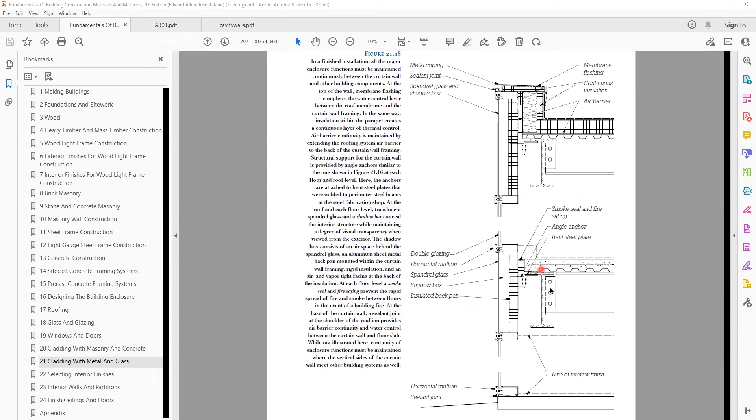So the detail we have is going to be slightly different because we have those K-series joists that are sitting on top of the beam. This is a little closer to what we have. We have these K-series joists that come and sit on top of the girders. And then on top of it, we have a metal deck and concrete. In our case, we will have our cavity wall here for this assembly. So it's a little bit of a combination of this detail and the one we were just looking at.

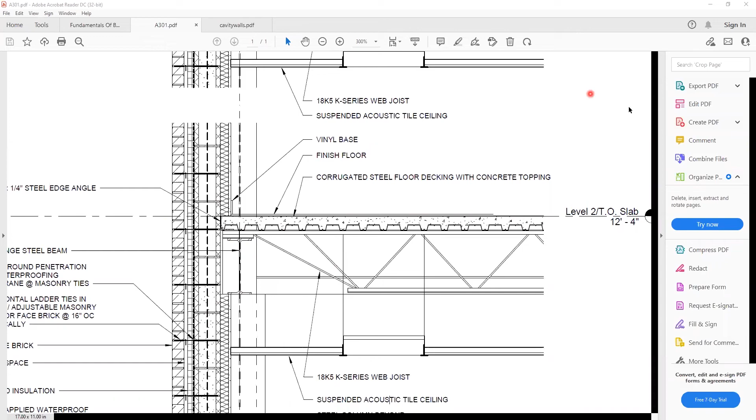So back in your Revit file, as I mentioned, this assembly is going to go on level 2. So I'm going to click on level 2. It's going to go on top of here. And there's a couple things that we need to do before we start to place the floor. If you scroll down to the family section, you're going to see a category called profiles. You can expand that section, and in there you'll find a form deck non-composite. So we're going to double click on that.

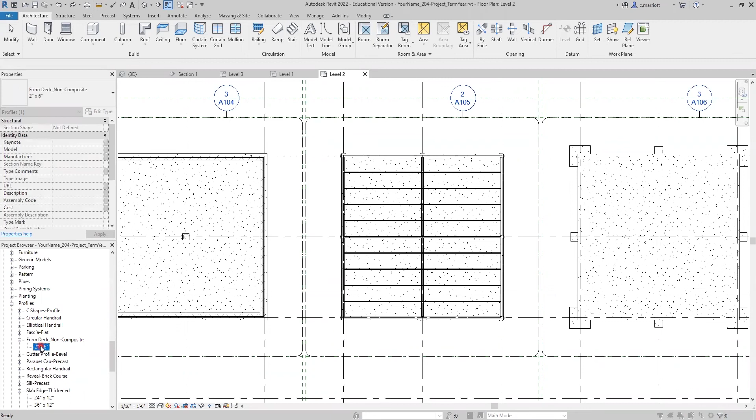And one of the changes that we're going to make is instead of using a 2-inch metal deck, we're going to use a 1.5-inch deck. So I'm going to duplicate that type, and I'm going to rename this one 1.5 by 6 and say OK.

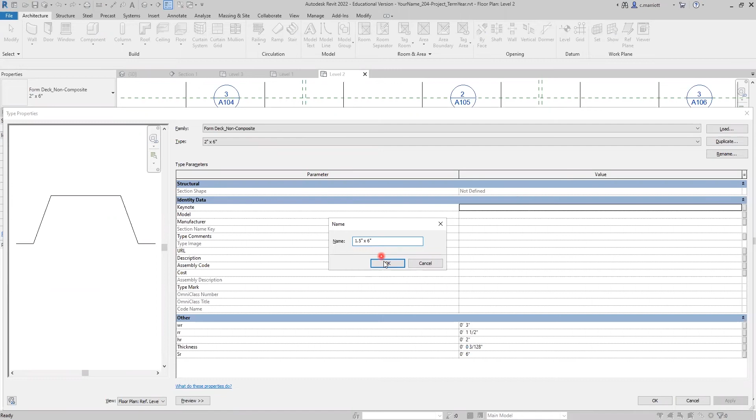This is a continuation of the video on putting together the composite deck. So it's a metal deck with a concrete slab on top. So you'll notice that I'm missing some things that you may have in your file. But in this phase, we're going to pick up where I left off, where you were defining the dimensions of the deck. The height here is what we want to change from 2 to 1.5, and then OK.

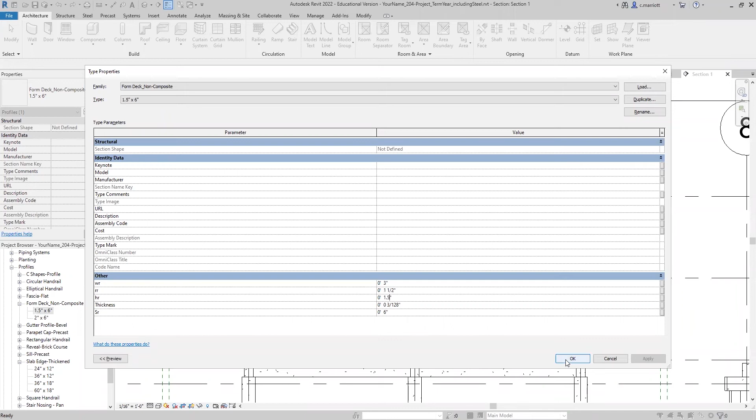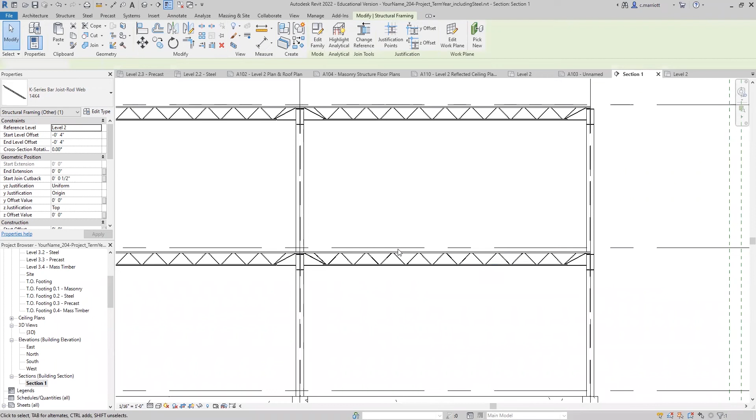All right, now we're ready to put the metal deck onto level 2. I'm going to go to level 2 and I'll zoom in to the steel structure. And now I'm ready to place the deck, but I need to make a couple of changes to an existing family. So one thing you'll notice is that when I click on these K-series joists, they're -4 inches below level 2. We're going to fill that area with our deck and our concrete slab.

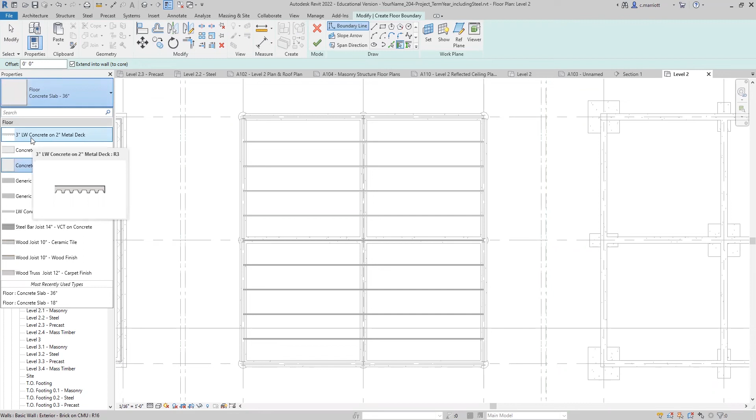I'm going to make a copy of the family. So architecture, floor, let's go to structural floor, look for one called 3 inches of lightweight concrete on 2-inch metal deck. We're going to edit the type. We are going to duplicate the type. And I'm going to have 2.5 inches of lightweight concrete on 1.5 inches of metal deck. Say OK. Let's actually get rid of that 2 at the end. We don't need that.

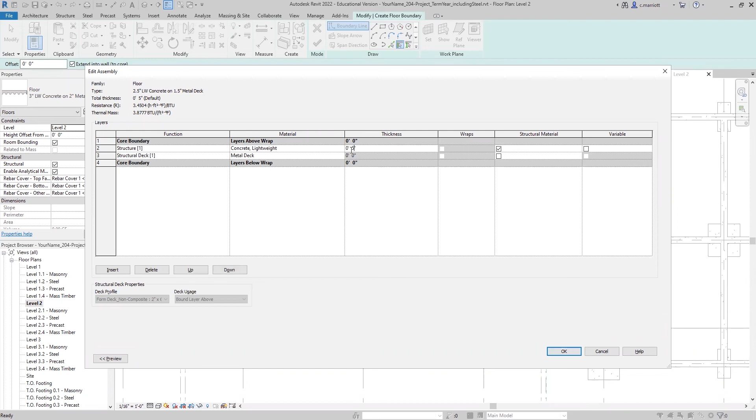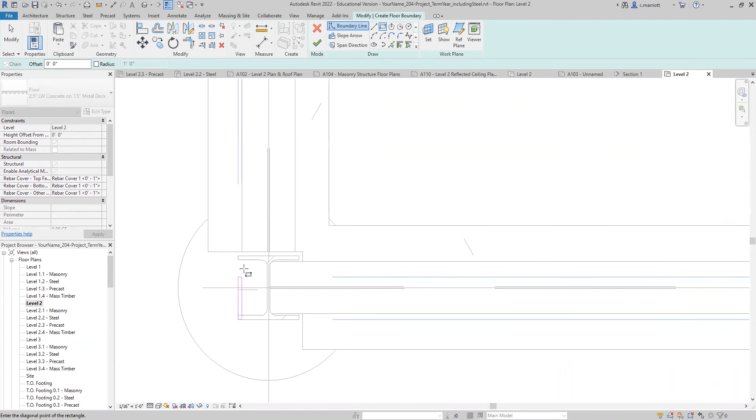And I'm going to edit the thicknesses. The total is going to be 4 inches. Say OK. And OK. So now I'm ready to place my floor boundary. So I'll use the rectangle tool and I'm going to snap to start with the corner of my column, and I'll come to the other side and do the same.

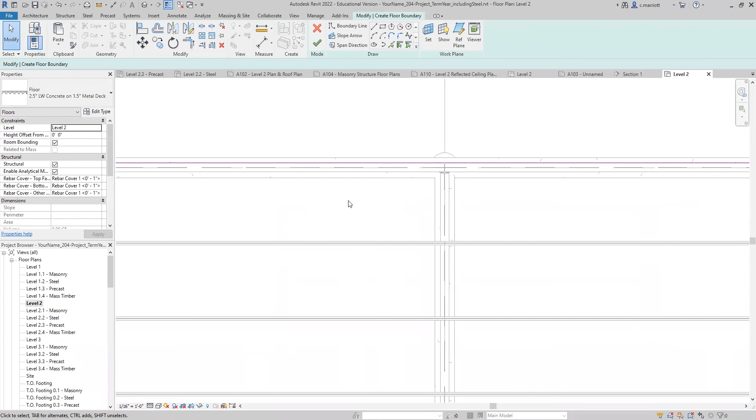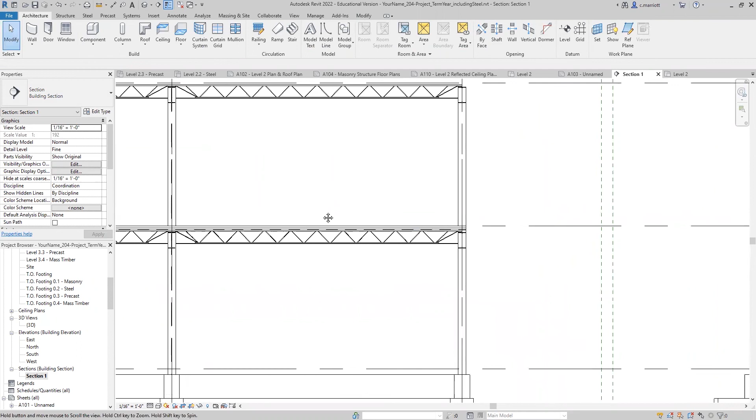And I think actually that will work fine for what we need in terms of the detail. It will stick a little bit past the beam. So I'll click on the check mark. When I zoom in at my section, I can see I've got the deck there sitting on top of that K-series joist. That is it for the metal deck and concrete slab.